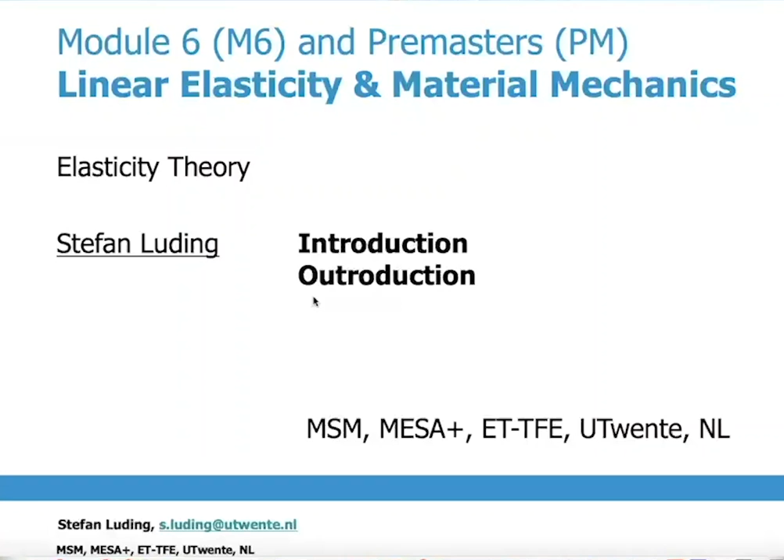Now, Module 6. And for the pre-masters, you zoom into elasticity, your conditions are slightly different. In Module 6, it's about materials and in particular about polymers. It will be about elasticity and mechanics. That is my part of the course. You will talk with me about this. And it's about tribology and contacts, mechanical contacts between different materials and the mechanics thereof. And in Module 6, the project combines all this.

So I will make reference sometimes to the project, so the pre-master students are maybe not even informed about this. But anyway, the project is supposed for the Module 6 students to bring all these things together. For the Module 6 students, there is something which was mentioned in the project description, and that is about mechanical, static, and impact loads.

Okay, so mechanical statics and elasticity, statics, solid materials, and elasticity, that is what belongs together. And impact is when elasticity reaches its limits. And that one I will teach in relation to materials and material mechanics. What are the limits of elasticity? But most of the time, 70% of the course will be about elasticity, and then materials mechanics will be about the limits of elasticity.

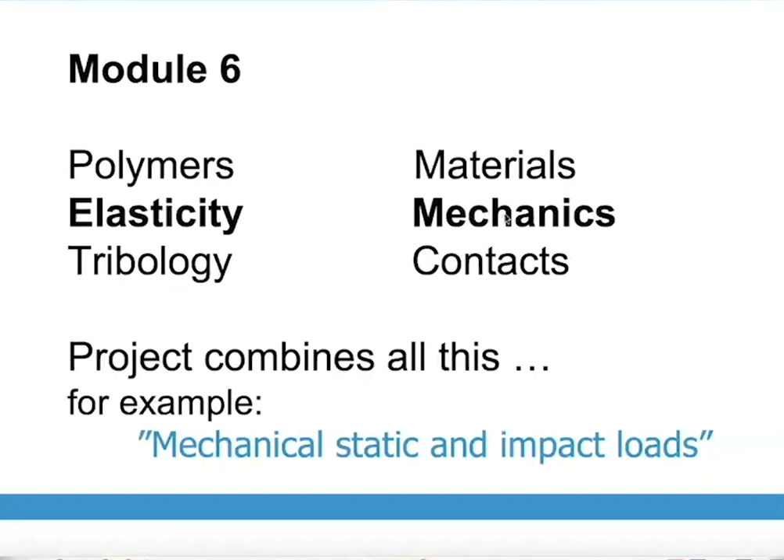Now, Elasticity Theory overview, and this is common to both groups of students. Today, introduction. This is what I'm doing now. And the sequence in the whole lecture series will be from mathematical and mechanical basis, ability to perform and interpret finite element, and the knowledge about material behavior. Now, in the introduction, I reverse the order. Later, most of the course will be about mathematics and mechanics. It will be rather theoretical, about linear algebra, tensors, stress and strain. That comes later.

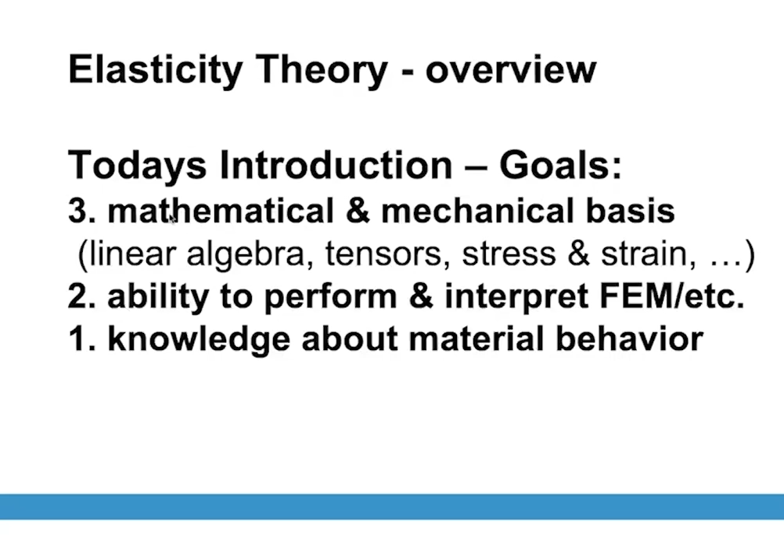Also, after my lecture, my postdoc assistant, Kia, will show you how to perform and interpret finite element. This is not the goal of this course, but we want to show you this as an example because this is what you will be doing in your future career, most likely, if you ever work with mechanics or solid mechanics or elasticity theory. Okay, and knowledge about material behavior I will show you now first. So first, number 1, 2, and 3, but the majority of the course will be 3, 2, 1 later.

Now, materials. Overview over materials. And this is about fluids and solids in general. So you have water and you have sand where you can walk on. Sand is solid-like almost, and fluid you can swim in, but you cannot walk in. Most of us cannot walk on water. Now, fluid materials like water or gas are non-solid.

Solid materials, that is metals or polymers in particular, a lot of reference will be made to polymers. It's also composite materials like concrete or fibrous composites. It's organics, like wood or tissue or bone. Those are all solid materials. Now, we also have another type of solid materials which are granular, like the sand on the beach. So sand, soil, rock, grain, rice. They consist of solids, but they are cut into many pieces, particles, powders, pills, granules.

And they are very small particles, but also very big particles, like the sun, our Earth. These are big particles circulating around each other. Okay, and there are many applications like additive manufacturing or geotechnical applications or natural disasters like avalanches. So all these things have to do with materials, their behavior or their not so good behavior, and that they become fluid or solid. And in an avalanche or a landslide, the land is solid, then it becomes an avalanche fluid, and then it becomes solid again.

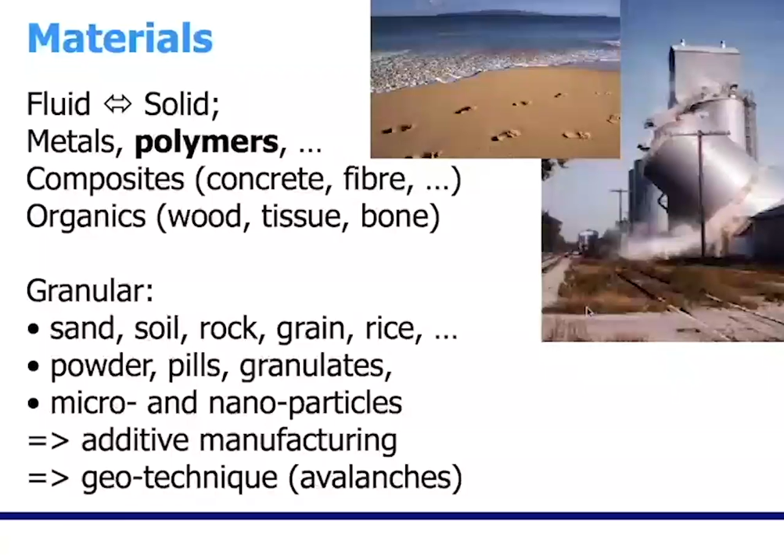Okay, so this is general considerations about materials. We are actually working with all these types of materials, in particulate materials, particle systems. And this is an example which most of you might still remember. Before the time of mobile phones, we had an hourglass in order to know how long our eggs would be cooking on the stove. Okay, and in this small hourglass, particles are flowing.

And in this hourglass, particles are also starting to flow when we open. Now, open. No, actually, they were flowing already. Okay, show it again.

Okay, these particles are flowing also, but then they block. And during this blockage, this could cause so much forces or loads on the outside walls that this silo breaks. In some situations that can happen. Okay, that was related to the moving before. So we have materials which are fluid, we have materials which are solid, and particle systems are sometimes fluid, sometimes solid, sometimes both, like in these flowing situations. We call fluid to solid transition jamming, and we call the solid to fluid transition unjamming. This is a general wording.

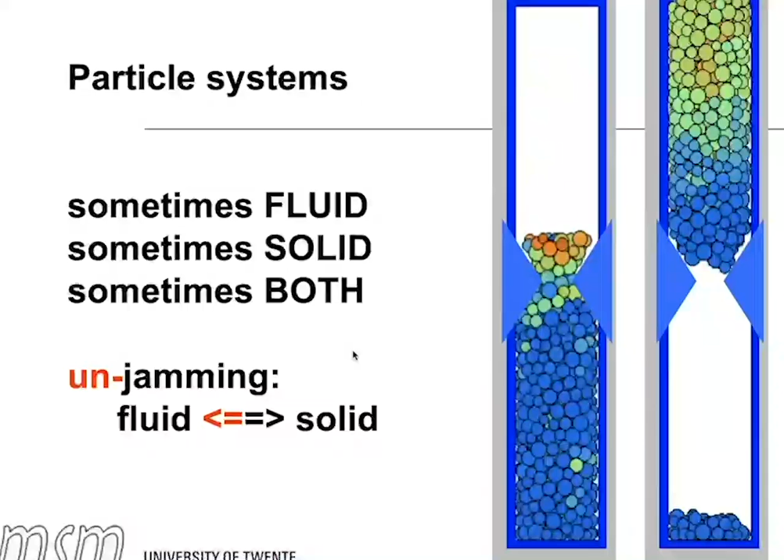Now, when we talk about linear or nonlinear materials, there are more things to say. In a fluid, the kinetic energy is most of the time important. The viscosity is important. In a solid, the potential energy, the mechanical energy is important. And sometimes if both, then both of them are important.

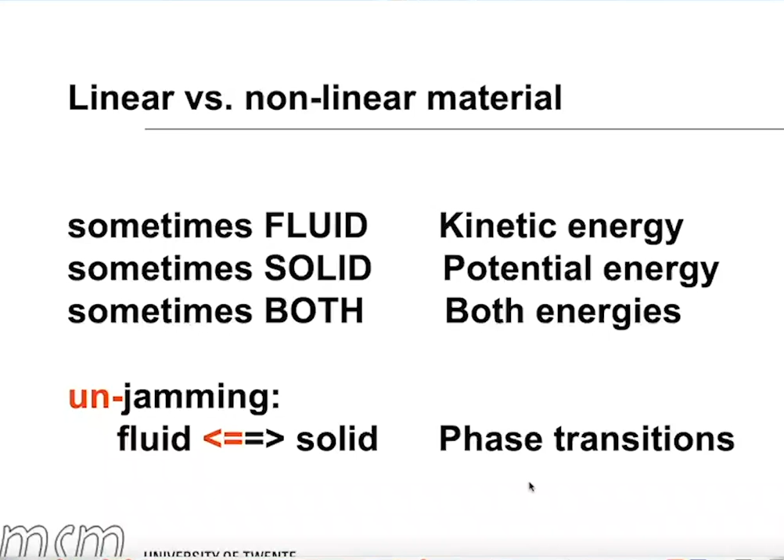In the transition from fluid to solid, we talk about phase transitions in general. I will not talk about phase transitions in this course very much, but I wanted to give you the general picture. When you melt ice, then it becomes fluid water. That's a phase transition. When you have fluid water and you freeze it, now we will have winter freezing, then you will see phase transitions of melting and freezing.

Now, this I stole from Wikipedia. This type of plots and more information you can see on the Wikipedia links. I will give you the material details later. So nonlinear material, sometimes solid, sometimes plastic. This is about stress on the vertical axis, force per area. I will come back to that one many times. And strain on the horizontal axis. Strain is change of length. Stress is force per area.

And the red line is increasing the load on this simple bar. So the load on the bar is tensile forces. We stretch the bar, and the area of the bar, A, is just signifying the area. Force per area is then stress. Now at the beginning, in regime 1, we have elasticity. So stress-strain has a linear slope. That's linear elasticity, and E is the modulus.

At point 2, it becomes nonlinear. At point 3, it becomes plastic. At point 4, when we get up to here, the bar is already damaged. And when we go back, we will go back to a strain of 0.2% permanent deformation. So it can be that we go back on an elastic line, but there is a permanent plastic deformation.

Okay, now this was explaining this figure. I will give you much more details about stress and strain, and it will get quite more complicated and more mathematical. But this is one of the things in the exam you must know to interpret and to understand such graphs.

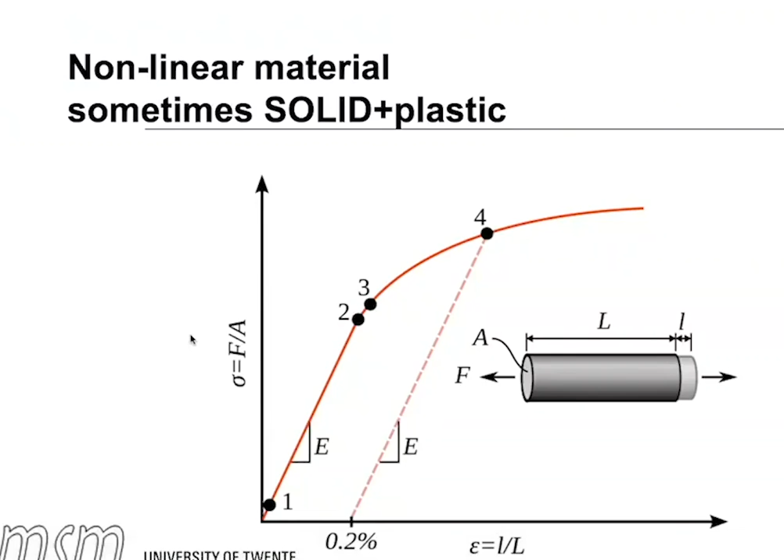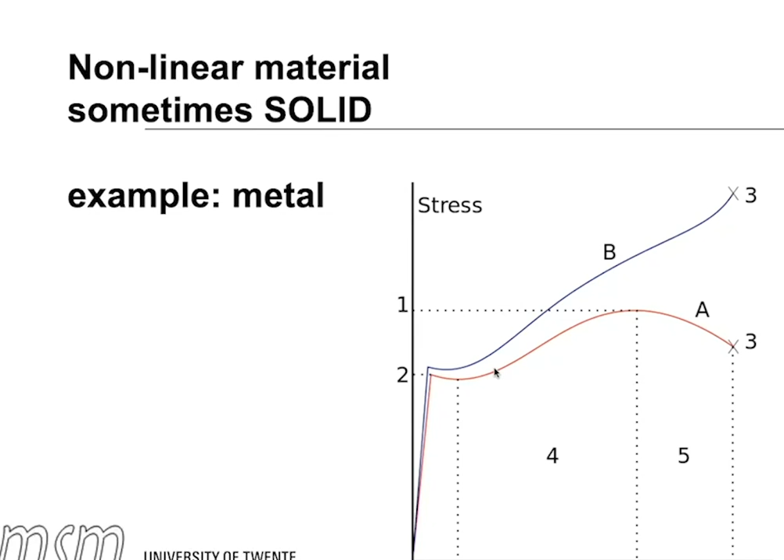But in the exam, you must be able to understand this plot and give names to 1, 2. Understand what is 3. Understand what is 4 and 5. What's the difference? So this is in order to tell you what you don't know yet. Most of you probably don't know. Some of you might know.

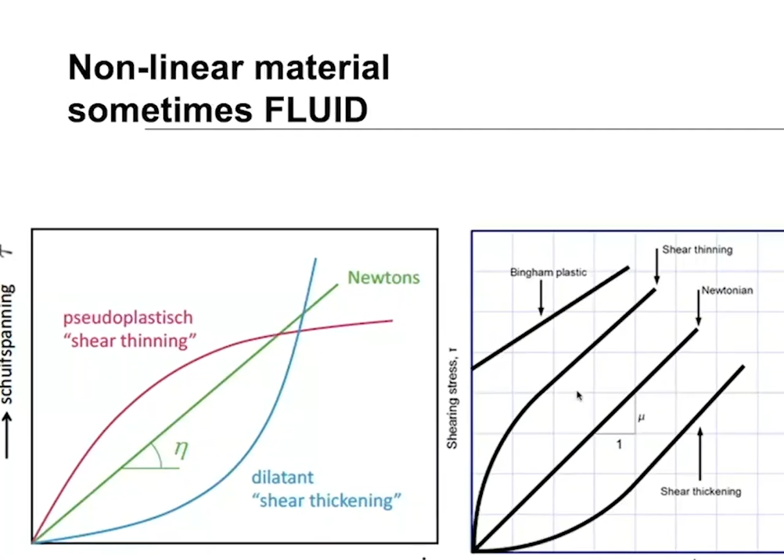Everything that is linear relates to linear, but most of the materials will be nonlinear at some point. Okay, so linear materials, nonlinear materials. Most of the time I will talk linear. Sometimes I will talk nonlinear. Okay, now the next part of the overview concerns rheology.

Seems somebody is waiting in the lobby. Can you please let them in? He is in. Okay, good. Thanks. I'll go back to PowerPoint.

Yes. So it's about the general rheology. Again, I stole it from Wikipedia. And this is about continuum mechanics in general. That is the mechanical and mathematical art of understanding materials. And then continuum mechanics is split up into solid mechanics and fluid mechanics. I was talking about the words solid and fluid many times. So most of the time we will talk about solid mechanics in this course, and most of the time we will talk about elasticity.

In fluid mechanics, you had some courses on fluid mechanics, and Newtonian fluids or gases are described by continuum mechanical equations. Solids are described by continuum mechanical equations, but some terms disappear in one material and are important in the other material, or the other way around. So elasticity and Newtonian fluids are all described by the same continuum mechanics, but the equations look different because some terms are off in one case and not in the other.

Okay, and when it goes from solids to fluids, there are many solids which behave plastically, which is not linear elasticity, which is halfway towards fluid. Non-Newtonian fluids are halfway towards solids. And this zone here is the domain of rheology, where elastic solids are not perfectly elastic anymore. When Newtonian fluids are becoming nonlinear or non-Newtonian, rheology is the science we are talking about. Okay, but our focus will be on elasticity in most of this course. In the last section, I will do a lot more about materials.

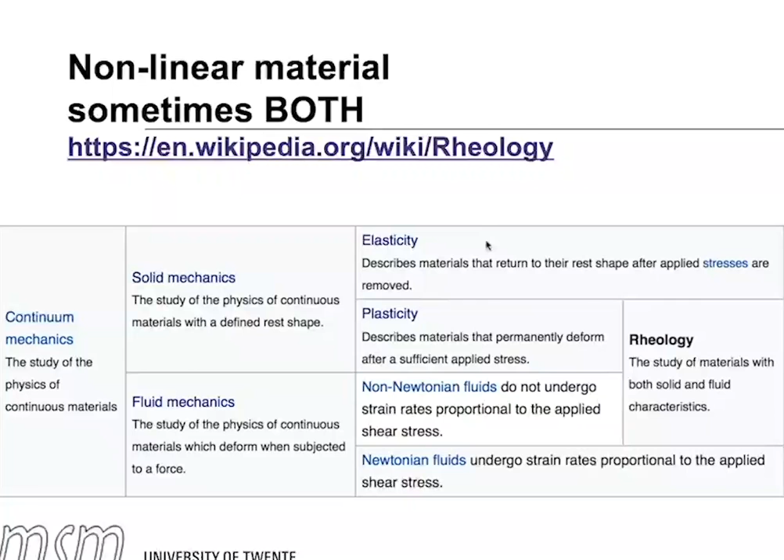Now, the elasticity theory material on the Canvas site, what have we provided for you? Some of you have probably already scrolled through the material. It's on Canvas. You should all be able to see it now. There is a schedule on elasticity. Those of you who clicked on the link have been there, evidently. The presentations and materials. There are readers and books. There are videos, and there are assignments and solutions. So those are the 5 slides. I want to give you a few more details on that.

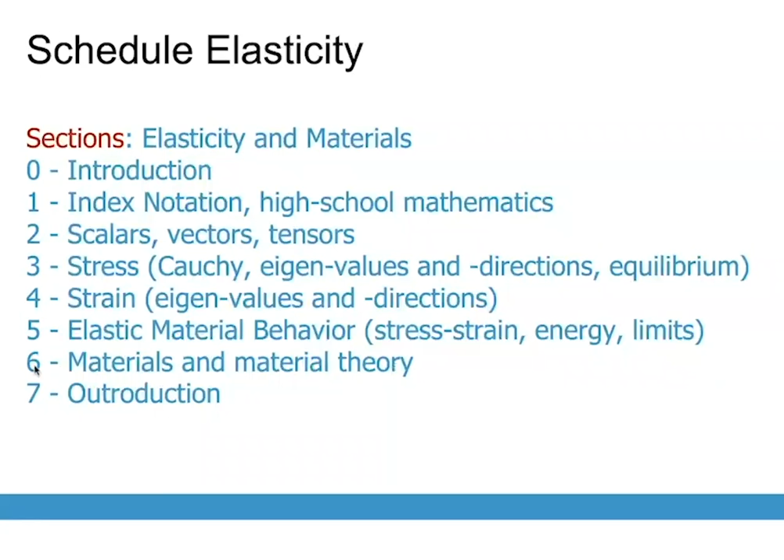Okay, and these will be presentations. So the presentations will take you, if you attend all of them, about 10 hours, maybe a little bit longer. But however... We have a question. Do we need specific literature for this course? Yes, exactly. Thanks for the question. I'll try to answer it. Now, the presentations, the material is online already.

The practice material is online already, and that is the biggest part which I recommend that you spend your time with. I have a big amount of hours on practice because the exam will consist of mathematical operations with pen and paper, which you have to do. And if you don't practice, you will not pass the exam. Most of you will not pass the exam if you do not sufficiently practice.

So we provide you practice material, we provide you example exams from previous years, such that you get a clear idea what is expected during the exam, and the exam will not change too much from what you see on Canvas. And many of you probably don't need anything else.

Okay, the online links, like the Wikipedia links which I mentioned to you today, those links you should spend a few hours with to read through them. It's not the major part of this course, but some questions in the exam will be about those online links. So think of 2 hours, maybe a little bit more,

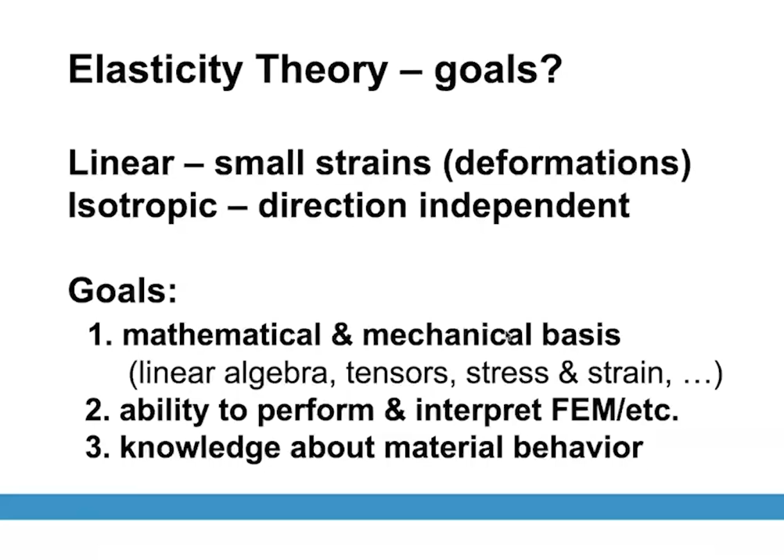Okay, and afterwards I will continue with the mathematical and mechanical basis. So today, in this introduction, as I said, I gave you a very basic knowledge and overview on material behavior. This is done now. You will see finite elements in a few minutes after a small look at the chat and if there are questions. And then we will do the mathematical and mechanical basis for the rest of the slot.